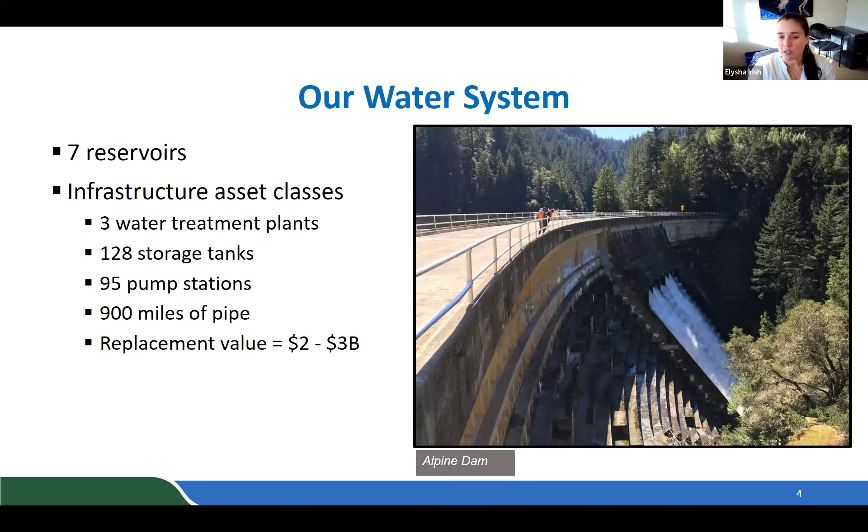Our water system is comprised of 7 reservoirs, and we have a vast array of infrastructure all over our service area. It's comprised of 3 water treatment plants, 128 storage tanks, 95 pump stations, and 900 miles of pipe that has an estimated replacement value of about $2 to $3 billion. We'll be going into each of these asset classes in more detail later on in this presentation.

But I also wanted to touch upon another critical piece of our water district, our watershed, which is the source of about 75% of our water supply, has about 150 miles of roads and trails, almost 22,000 acres of publicly accessible land, and is home to 400 animal species and about 1,000 plant species.

Now, getting into detail on some of those asset classes, we have about 900 miles of potable pipe in our system. About a third of that is comprised of cast iron. A little less than half is welded steel. And then the remainder is comprised of about 10 different pipeline materials. The average age of the pipe in our system is about 47 years, and about 93 miles are 75 years or older. The pipeline that we install today is primarily welded steel or PVC pipeline material, and it has an estimated useful life of about 100 years.

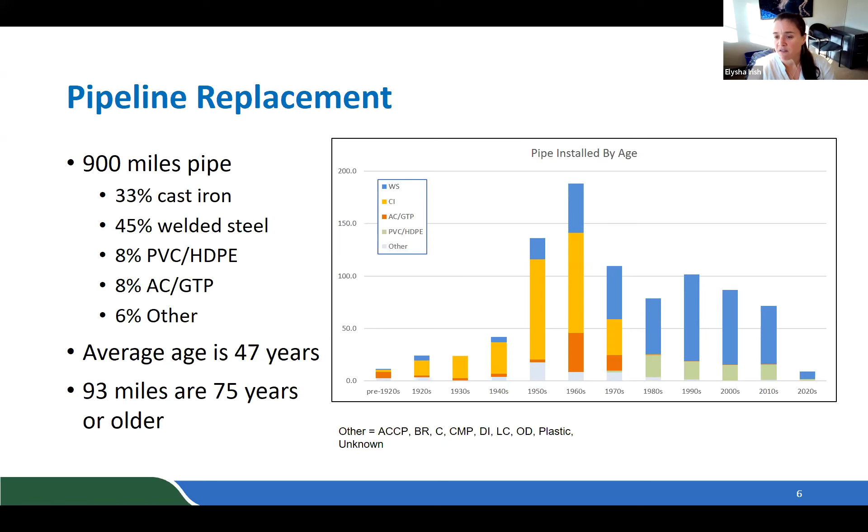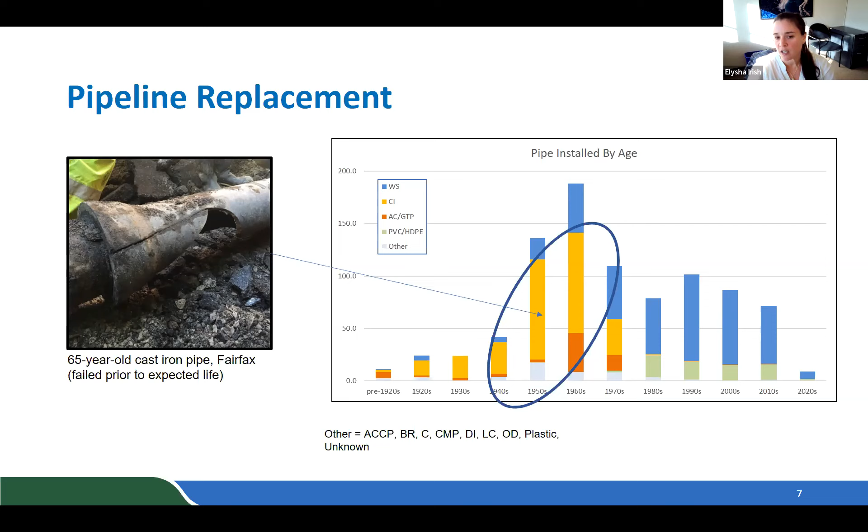The majority of the pipe in our system was installed in the 1950s or 60s. As you can see in these orange bars, the cast iron represents over 200 miles of pipe in our system, and we can reasonably assume that this has less of an estimated useful life. The photo on the left here shows a 65-year-old cast iron pipe in Fairfax that failed prior to its expected life. When cast iron pipe fails, it tends to fail catastrophically, as you can see in this large split in the photo. And it's approaching the end of its useful life, in that in 10 years, most of the cast iron pipe in our system will be 75 years or older.

Moving on to our storage tanks. We have 128 storage tanks in our system. Most of them are comprised of some form of steel. We have 65 welded steel tanks in our system, 36 bolted tanks, and 8 riveted tanks. We also have some concrete, hydropneumatic, redwood tanks, and 1 plastic tank in our system. The chart on the right here shows the material type of each tank and either the decade that it was installed or that it was last recoated.

We have the opportunity for our welded steel and riveted tanks to recoat them cyclically to extend their useful life. The recommended recoating interval for these tanks is about 20 to 25 years. And we have 39 tanks that are overdue for recoating in 2023. The cost to recoat a 1 million gallon tank in our system is about $1.5 million.

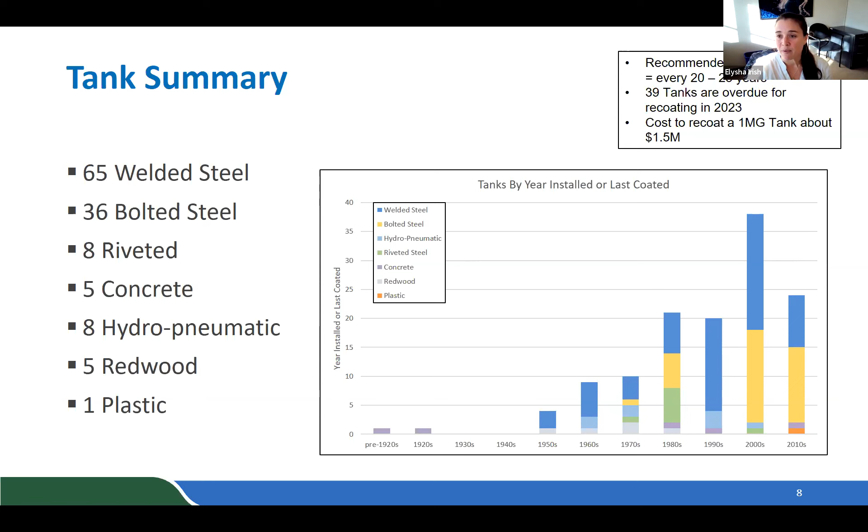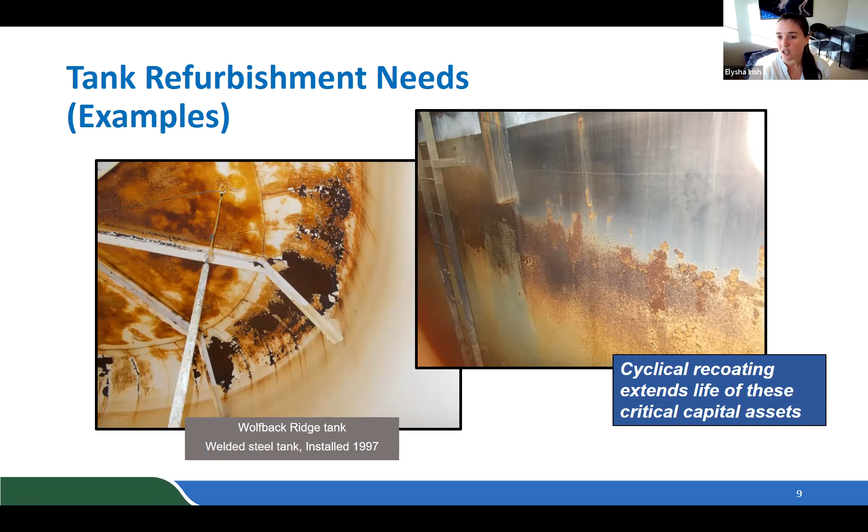So we have some opportunities for investment in our storage tank asset class. These are some examples of some of our tank refurbishment needs. These 2 photos show our Wolfback Ridge tank, which is a tank that is installed in the hills of Sausalito and was installed in 1997. And while this tank is only 25 years old, it does present an example that some of our assets may fail prior to that. And investing further in our storage tanks and recoating more cyclically will allow these projects to maintain as recoating projects, as opposed to increase into major tank replacement jobs.

Along our watershed, we do have some major initiatives taking place. The main one being our fire and fuels management program, which is implemented through our biodiversity fire and fuels integrated plan. We invest about $3 million on this program annually, with funding coming from our capital program, operating program, as well as outside grants.

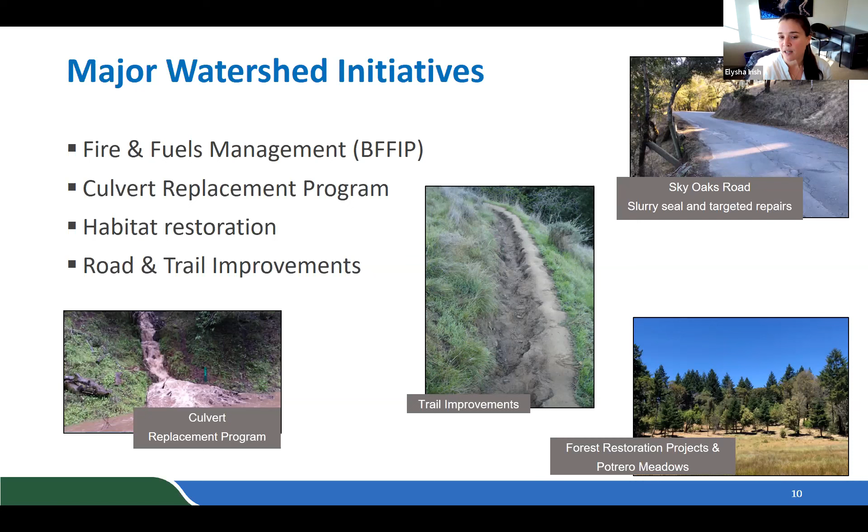Another major initiative is our culvert replacement program. In this program, we're aiming to replace about 100 failing culverts within our system. Many of these culverts were not designed to sustain our peak winter flow and are failing. It's critical to replace these culverts, as many of them lie under emergency access routes or under major transmission lines. Also on our watershed, we're performing habitat restoration as well as road and trail improvements.

Moving on to treatment plants. We have 3 treatment plants in our system. The big one being our San Geronimo treatment plant, which is located out in West Marin with a sustainable capacity of about 28 million gallons per day. We also have the Bon Tempe treatment plant located on our watershed with a sustainable capacity of 16 million gallons per day. And finally, our Ignacio treatment plant in Novato, which receives the water that we get from the Russian River, and that has a sustainable capacity of 12 million gallons per day.

There are a number of investment opportunities that staff sees that we can make in our treatment plants. The primary one being the replacement of our clarifiers. The 3 clarifiers in our system, 2 at San Geronimo and 1 at Bon Tempe, currently lack lateral resistance and have the same design as the Rinconada water treatment plant clarifier that's located in the South Bay and is part of Valley Water. You can see in the photo on the right that the arms to the clarifier sustained significant damage after the Loma Prieta earthquake in 1989. Those are actually the launders that collapsed. They ran across to the center, but they fell in. And so we see this as a great opportunity to invest to increase the seismic reliability of our treatment plants.

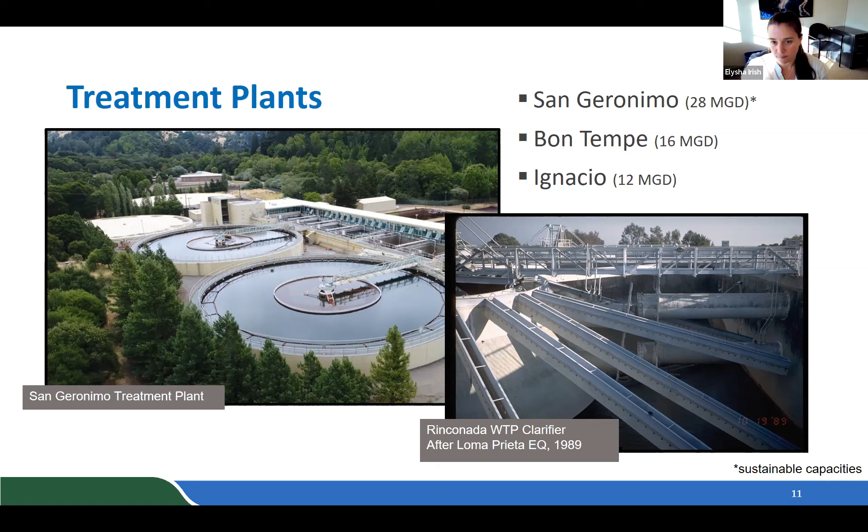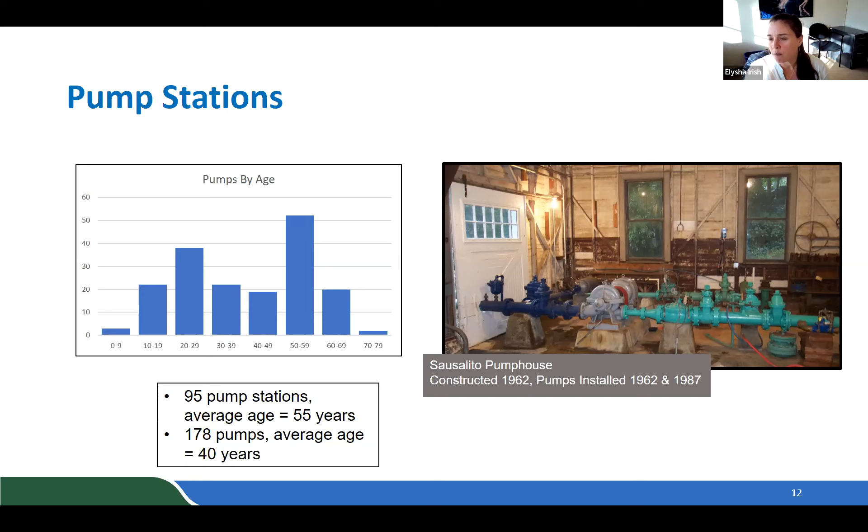Now that we have reviewed the state of our capital assets, we're going to talk about the process that took place to develop our 10-year financial plan. This plan was conducted across 5 different workshops between December 2020 and May 2021, and was developed in concert with our board, as well as engagement from the community. This plan examined a range of levels of investment in both our capital and operating programs. 4 different scenarios were developed across our asset classes, and these scenarios were evaluated against resource availability. Ultimately, the board selected a hybrid scenario, which we'll be getting into detail on in the next slide or 2.

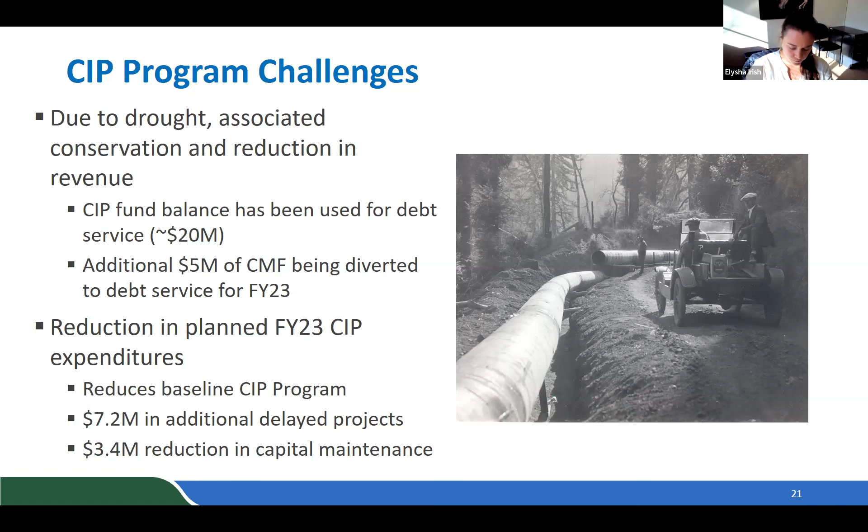And as we think about moving forward with these fiscal challenges, we are looking towards outside funding, such as grants or debt funding, to pursue some of these key large investments. We've gone into some of the details on them when we talked about the exact projects that were in the hybrid option, but we will be going into more detail of these projects as we go forward in our rate setting process.

In summary, we do have a very active CIP program with ongoing investments to maintain our water system reliability. Due to sustained conservation and reduced water sales, our capital investment has been reduced due to $5 million of our capital maintenance fee and $20 million of our capital fund balance going towards debt service. To help fill this gap, we plan to aggressively pursue outside funding.

Since July 2020, we have received $30 million in grant, state and federal funding appropriations, and low interest loans. And we currently have over $60 million in applications, including $22 million for the Pine Mountain Tunnel Tank Replacement Project and $28 million for supplemental water supply. We will be considering various levels of capital funding, including a potential bond issuance as part of this rate setting process.